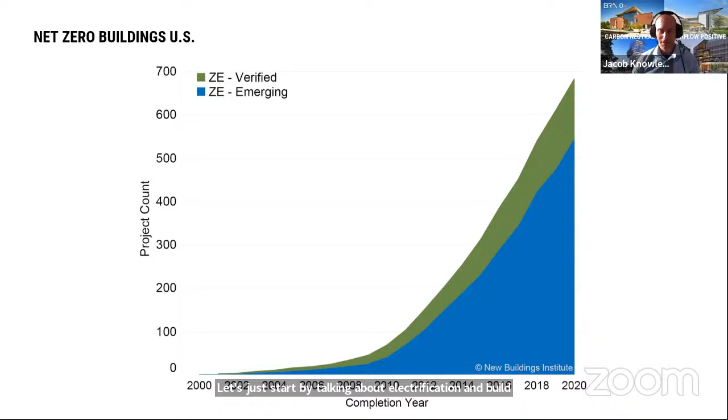So electrification of existing buildings. Let's just start by talking about electrification of buildings in general, and net zero buildings is growing exponentially in the market across the entire United States.

In Massachusetts, Built Environment Plus recently came out with a report showing that there is 5.5 million square feet of net zero buildings in construction or operation in Massachusetts, and 7.2 million that are net zero ready, meaning entirely, or almost entirely, fully electric buildings that are ultra efficient and ready to run on clean renewable energy. Part of what that study looked at is what is the cost of net zero.

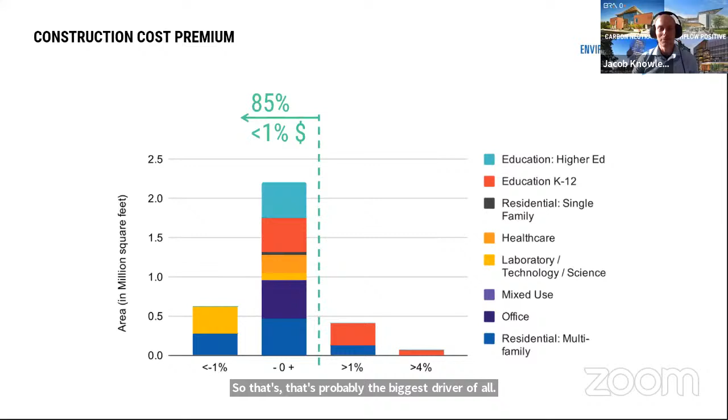Of the respondents, 85% showed that the construction cost premium was less than 1% compared to conventional design. That's probably the biggest driver of all that's made this possible, this rapid growth of net zero buildings. We've been working on many of those types of buildings and actually finding similar results in terms of the construction cost premium, typically being able to keep it below that 1% mark.

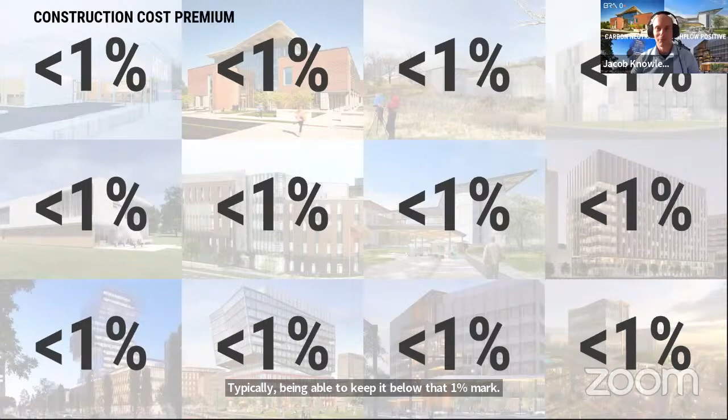Now that's for new construction, right? That's a lot easier because you have a big budget to work with. But the approach to net zero between new buildings and existing buildings is pretty consistent.

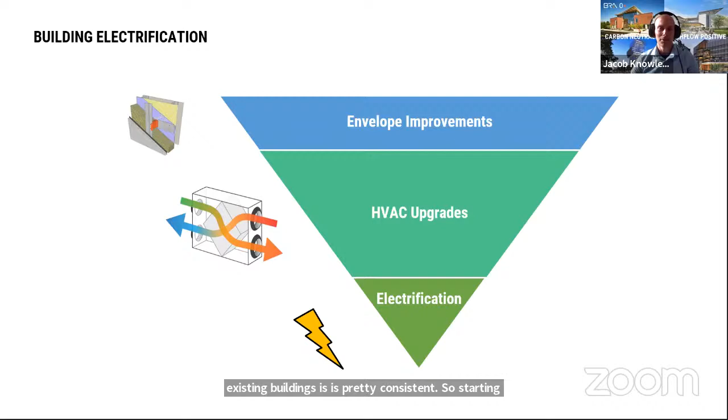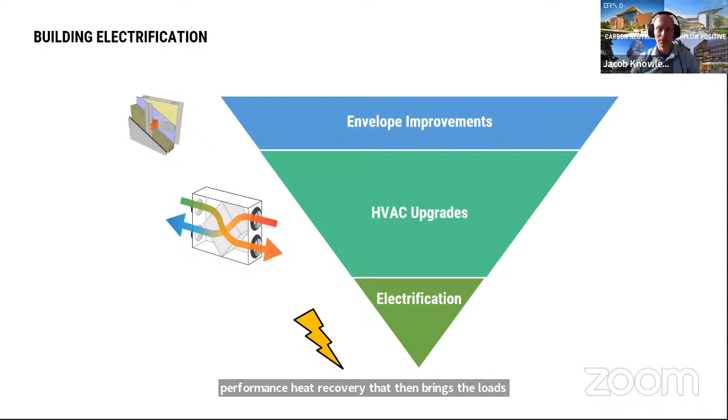Starting with load reduction first, you have to have a good envelope or make envelope improvements. You have to have efficient mechanical systems with high performance heat recovery. That then brings the loads down low enough that electrification, using heat pumps as your source of heating the building rather than burning fossil fuels, becomes not only viable, but makes it more cost effective.

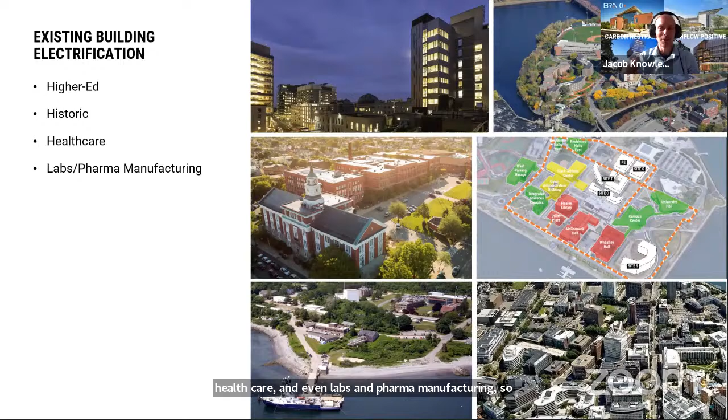So let's look at some existing buildings. We're going to talk a little bit about a few different building types, including higher ed, historic buildings, healthcare, and even labs and pharma manufacturing. So kind of going from easy to more and more difficult.

For higher ed, we've been working on some projects for UMass Lowell, UMass Boston, and others, URI Narragansett Bay Campus, for example, also looking at how do we achieve carbon neutral for their entire campus.

And there's obviously on a higher ed campus, there's a wide range of different building types, different conditions of the different buildings. Some are new, some are old, some are failing, some are in great shape. And so they have a wide range of energy performance.

Some of the key considerations that you have to take into account is how does it interact with the future growth of the campus? If you're going to be looking at district energy systems that are going to provide heat pump based heating and cooling, you want to plan for that future expansion, the transformation of the campus over time.

Another big factor is what level of retrofit is viable for the existing buildings to bring that load down first before you start to invest in electrification. And another big variable is, do you go with standalone electrification, or do you do precinct plants, or do you do a big central plant? Different campuses really lend to different solutions.

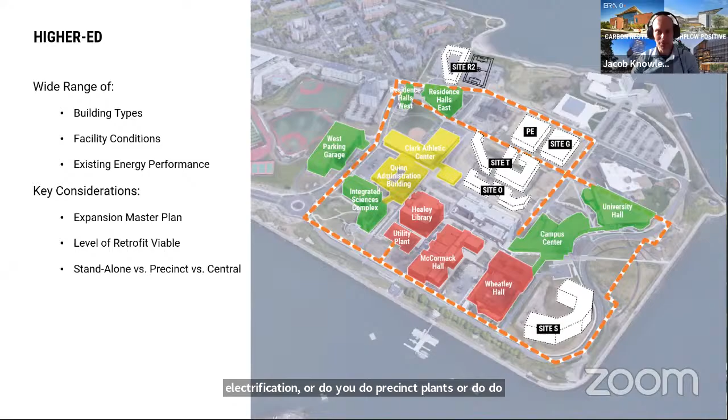So again, one of the key steps is bringing those loads down. We typically start by looking at the existing facilities, the existing buildings, identifying energy conservation measures, and particularly thermal heating load reduction strategies.

So it's not just about energy reduction, but it's also about reducing that peak load, you're going to use that peak load to size your heat pump plant. So the more you can bring that peak down, the better.

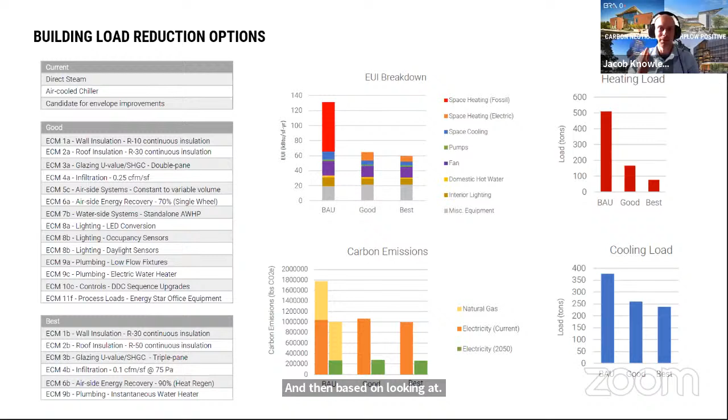And then based on looking at good, better, best, essentially levels of enhancements to the existing buildings, you can see on the left here, kind of business as usual, good or best level of retrofit options. And then you compare those with different types of heat pump strategies.

You could do ground source. That's kind of the old school go-to, is to go to ground source, because air source is a relatively newer technology. But now the air source technology has been accelerating, and market adoption has made it really a viable option. So we often want to look at a hybrid where we're looking at some ground source and air source combined.

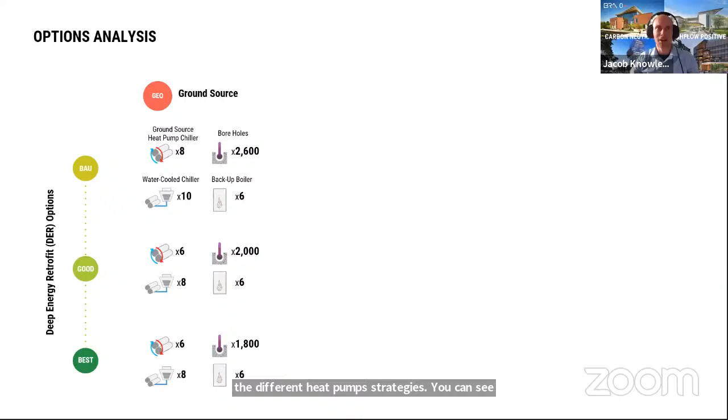And then the third option is to say, well, do you need to be 100% electric, or can you be 95 or 99% electric? Because those last few percents at a district scale often are the biggest drivers of that peak system capacity. And so as you start to look at what your scenarios would be, interpolating between those levels of retrofit and the different heat pump strategies, you can see there's a wide range of different outcomes in terms of how much infrastructure that you have to put into the plant itself.

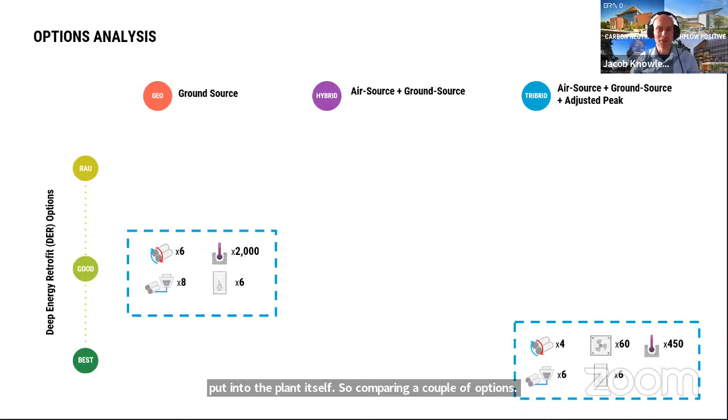So comparing a couple of options, you can see as soon as my computer stops bogging down on me here. Come on. There we go.

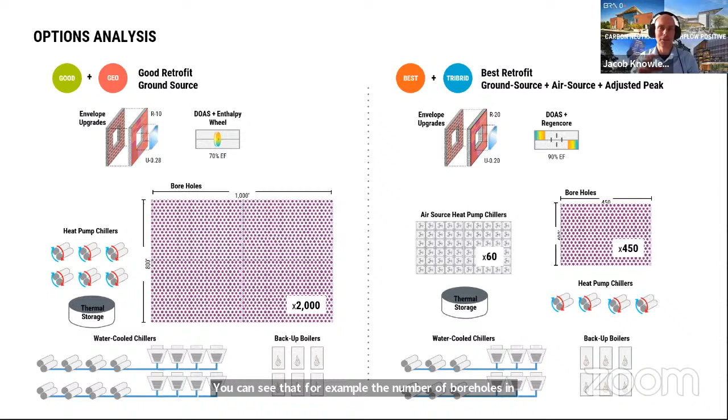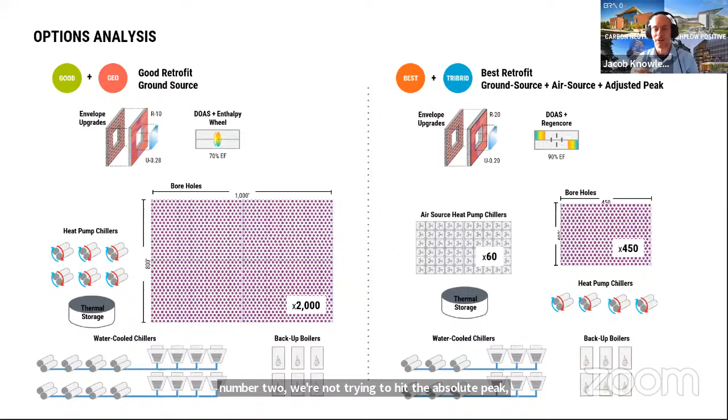You can see that, for example, the number of boreholes in a good level of retrofit with a fully geo system on the left is 2,000 boreholes for the geothermal system, whereas on the right it's only 450, because we've reduced the load, and we're not trying to hit the absolute peak, using air source heat pumps as part of a hybrid ground source air source system. That can be not just a budget driver, but can actually be the deciding factor of whether you can even fit the number of boreholes you need onto your campus at all.

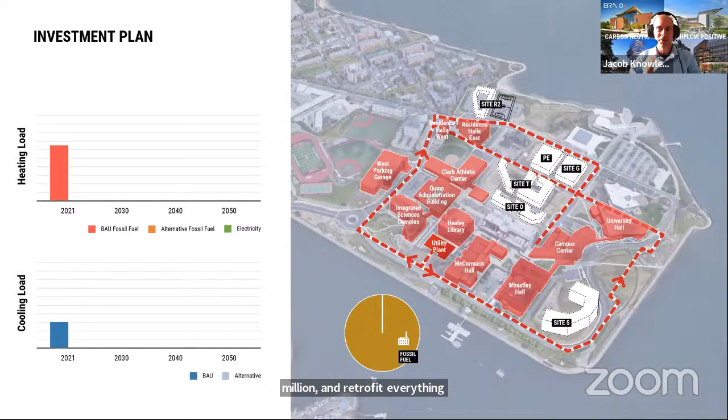So once you've looked through all of that set of options and picked your optimal outcome for that campus, you start to look at what is your investment plan over time. You can't just snap your fingers and spend $200 million and retrofit everything at the same time. So you want to be strategic in your sequencing of those retrofits, both of the buildings and the infrastructure, in time increments that are logical for the campus. Ultimately, having a real roadmap for operations to understand what you're going to spend when, what it costs to operate that system from that time forward, working your way towards a fully carbon neutral operation.

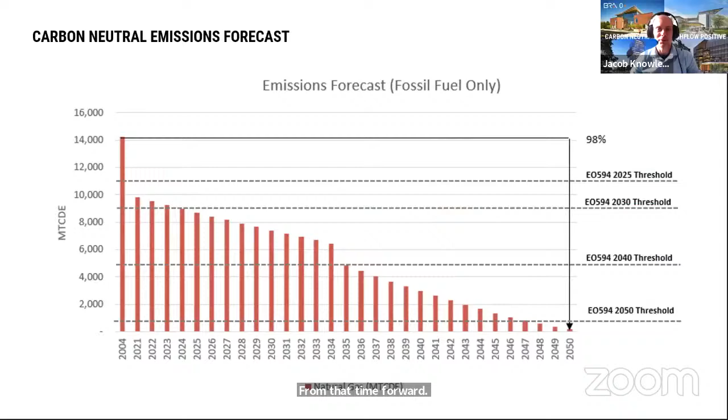So that's some higher ed examples. Historic buildings are a particularly unique challenge. We're working with the city of Somerville right now on all of their major city buildings, not including the schools, and some of these buildings are historic. So you can't just rip out the windows and put in a modern triple glazed window with fatter frames that have the fully insulated system.

So in some cases, maybe the best you can do is the sash replacement and weather stripping. Not ideal, but a lot of these buildings have relatively low window wall ratios. So if you can't go all the way in with super high performance windows, and you're really just trying to focus on air sealing and avoiding those leaks, that's a good option.

Strategies like smart vapor barriers and proper insulation techniques on the inside of existing masonry load-bearing structures is an important thing to evaluate. And then retrofitting the mechanical makes a lot of sense, looking at ultra high performance heat recovery on your ventilation air. Ground source versus air source again comes up here, where maybe in a historic structure, you don't want a bunch of air source units on the outside of the building, and you want to look at a geothermal system.

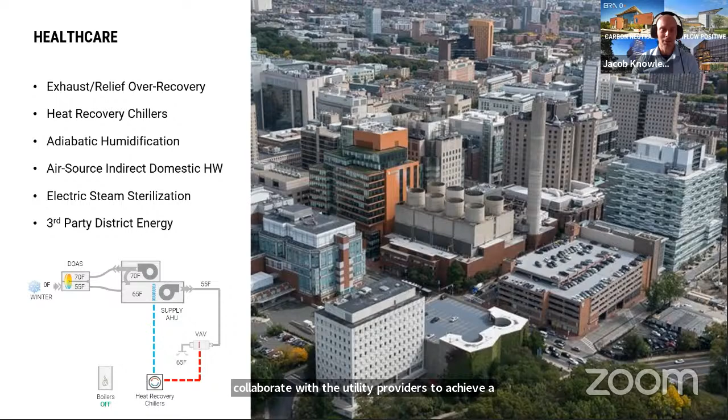Healthcare is an even bigger challenge, not only because it has higher loads and all these critical systems, but also in a lot of cases you have third-party central utility plants providing heating, cooling, electricity in long-term contracts. It's a challenge to figure out how to navigate the transition either away from those plants or collaborate with the utility providers to achieve a common goal of moving towards either electric or other fuel sources like hydrogen.

And finally, labs and pharma have even higher loads, particularly pharma manufacturing. Some pretty amazing technology is coming available now from the industrial world, where there are even heat pumps that can make steam. Sounds impossible, right? But if you have enough compression of the refrigerants, you can get it hot enough that you can boil water. So that's something that we're looking into.

Also, all that exhaust air leaving your labs is a huge energy resource that we're just not taking full advantage of with a conventional heat recovery system. So we're tagging heat pumps onto those heat recovery systems to basically supercharge them and create an exhaust source heat pump, a whole new world of heat pump systems by pulling heat out of the exhaust air. So these are the really exciting things happening right now.

And just to kind of bring it back to the beginning, that exponential growth of net zero and all electric new buildings was really unlocked by that moment where it became cost effective, and all these precedents started to build and show that it was possible. Well, same thing here with existing infrastructure on these big campuses and high energy buildings. We're starting to prove this out, we're starting to unlock it, and then there's going to be these precedents, and everybody's going to realize it's achievable, and there's going to be a sea change of transformation that's going to happen.

So we might need a little more financial leverage. For example, carbon emissions fines is going to be a lever on existing buildings that will start to tip the cost scales. But it's very exciting times.

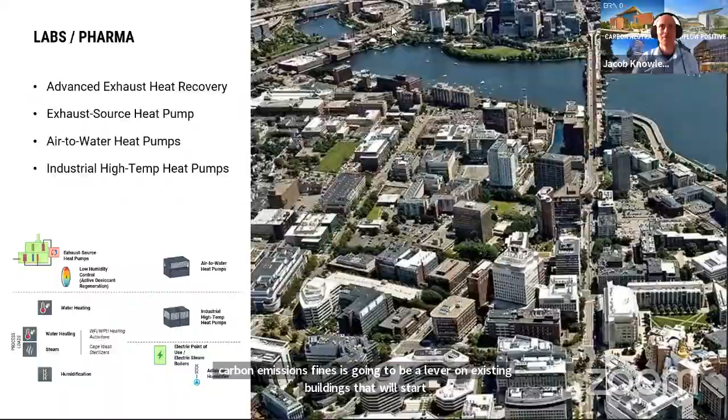Thanks, Jacob. I can see there's a lot of heat pumps in some of the solutions, and that's really a big change that's occurred. And we're seeing a lot of electrification policies as well, including some potential federal incentives in the Build Back Better or reconciliation bill that's under consideration now. So a lot of people are asking us, when and where will electric heating and cooling reliably lower carbon emissions compared to the fossil systems they're replacing? Are we already at that point?

What's your perspective? So that's another really cool thing - if you try to run an electric resistance heater, like a toaster oven, to heat a building compared to burning fossil fuels, there's a lot of places in the country where you're going to actually increase your carbon emissions. But that's what's so cool about heat pumps: they're not a 1 unit of electric in equals 1 unit of heat out. They're 1 unit of electric in equals 2 or 3 or 4 units of heat out.

For example, in ISO New England, like here in Boston, if you put in a heat pump versus a gas boiler, day one you're 50% lower emissions, because the grid is clean enough and the heat pump is efficient enough that you cut your emissions in half. And then you can ride the grid down as it gets cleaner and cleaner over time, as it's regulated to do by law, to get closer to zero. Or you buy renewables today and you're carbon neutral on day one, such as what Boston University has done. So using heat pumps is really unlocking our carbon neutral future right now.

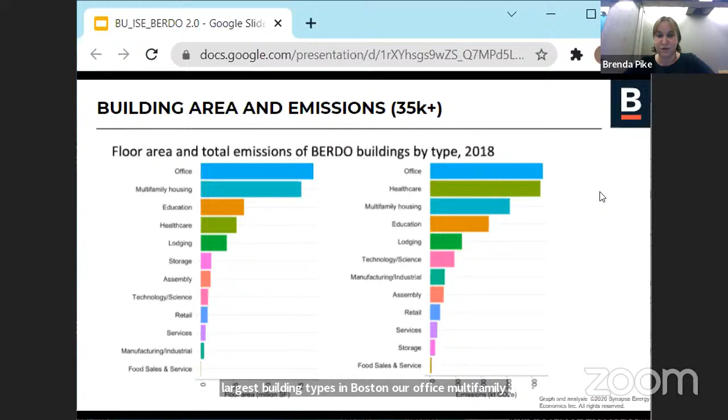And the targets are set by building type, and whether you look at it by floor area or emissions, the 4 largest building types in Boston are office, multifamily, healthcare, and education. So we'll just zoom into the standards for those. These standards were developed with our technical advisory group, which was managed by Synapse Energy Economics and included building owners, engineers, architects, etc. - probably some of whom are here today. And they looked at our benchmarking data for the last 5 years to set standards that were reasonable for each building type, but still met the city's 2030 and 2050 goals. These are set in kilograms of CO2 equivalent per square foot per year.

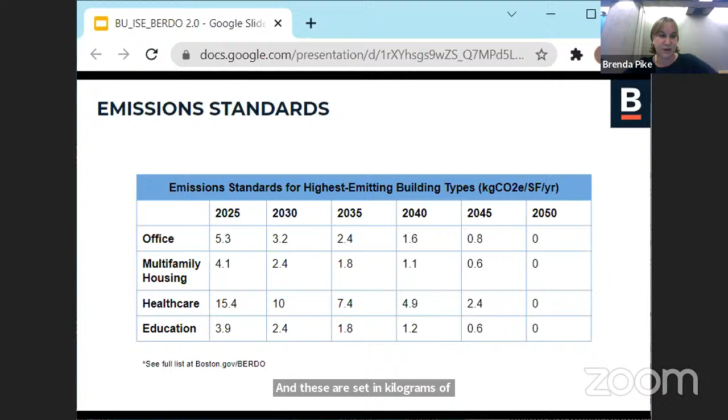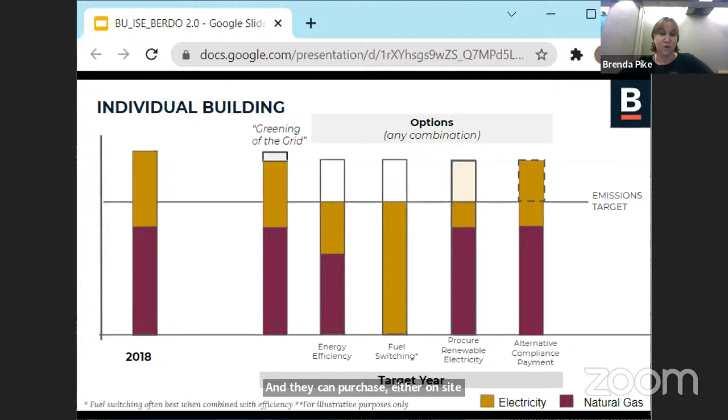So we have to make sure that we aren't requiring particular equipment. You can see here we're factoring in the greening of the grid according to Massachusetts' plan. And then to meet any given target, a building owner can choose to do energy efficiency upgrades, which will generally be the most cost-efficient option right now. They can do fuel switching to some sort of renewable heating and cooling, likely electrification right now. And they can purchase either on-site or off-site renewable electricity, or they can pay an alternative compliance payment.

And the alternative compliance payment is not a fine. There are fines, and those are set out in the ordinance. That's a standard amount per day, regardless of how close to compliance you are. But the alternative compliance payments are really intended for building owners who, for whatever reason, miss their target in a given year, and so for that incremental amount they can pay into a fund to help decarbonize other buildings.

In order not to disincentivize building owners from using other methods to comply, we set the alternative compliance payments to the average amount to decarbonize a building in Boston, which Synapse and the technical advisory group estimated to be $234 per ton.

And actually, let me go back here. If you want to dive into how the alternative compliance payments were calculated, Synapse's technical methods overview is available on boston.gov/BERDO. They estimated emissions, uses, and costs by building type using not just BERDO data and the ASHRAE Level 2 energy audits that we received through BERDO, but also tax assessment data, market characterization studies done for the Mass Save programs, EIA data, and the Carbon Free Boston Buildings Technical Report.

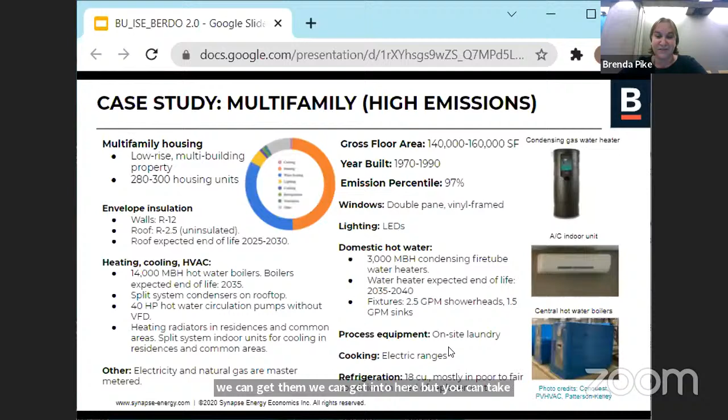But for this particular building, it makes the most sense to choose an individual compliance schedule. And then the major improvements that would get the building to those targets would be insulation at the end of the roof life in 2025, a VRF system by 2035, and heat pump water heaters by 2040.

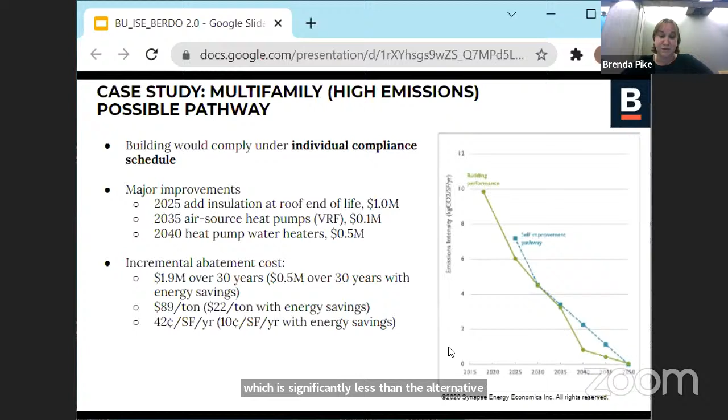And you can see the incremental abatement cost above what they would normally spend on their capital improvement plans is $89 per ton, $22 per ton once you factor in those energy savings, which is significantly less than the alternative compliance payment. So we're hoping that being able to do that comparison will really help building owners make decisions about this.

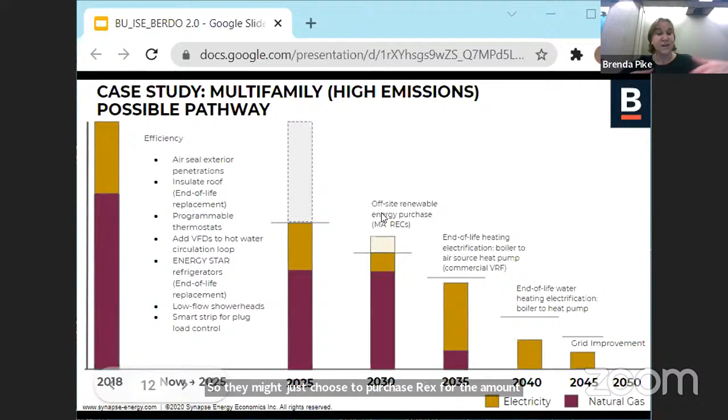And this gets into a little more detail about how they might choose to comply with each target. So in 2030, they don't have any retrofit plans. That doesn't fit into their capital improvement cycle, so they might just choose to purchase RECs for the amount that they're over the target. And then after 2040, they can just ride the grid to net zero.

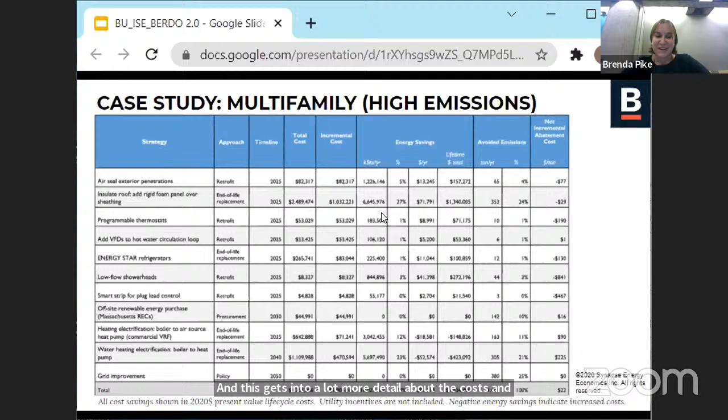And this gets into a lot more detail about the costs and savings for different measures. Again, you can take a closer look at this and the two other case studies that are in the appendix when the slides are sent out.

But pulling back a little bit, performance standards are being used across the country, with 7 jurisdictions right now having adopted them. There's a lot of information sharing going on between cities about this right now. I mentioned I'm working with Boston through the American Cities Climate Challenge, so 25 cities were chosen for that. And then also a group of cities have worked with the Institute for Market Transformation to learn about these policies together.

And there are some key differences between them. So for instance, Boston and New York have focused on emissions intensity for their metrics, but Denver, St. Louis, Washington State, and Washington, D.C. have all focused on energy use intensity. Different cities have different exemptions. For instance, New York exempts affordable housing because it would bump up against their rent control laws.

Some of them, for instance Denver, require each building to be on an individual pathway to net zero, with a set baseline for each building and an individual trajectory for each building.

DC requires all buildings meet the median Energy Star score or energy use intensity, which is reassessed every 5 years. There are benefits and drawbacks to all of these options, which are explored during the stakeholder engagement process. And all of these cities are different, so it makes sense that these laws are all slightly different, even if we're trying to get to similar goals.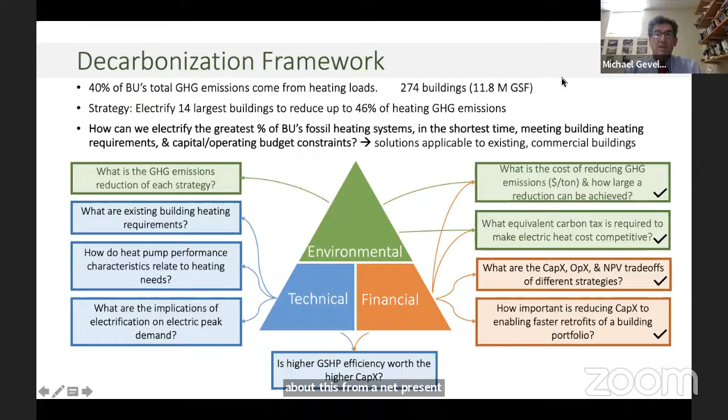Just to give you a sense of what we've been considering, as other speakers have talked about, you've got to do that energy efficiency first, but ultimately you're going to come to replacing the natural gas boilers that are being used, either boilers in buildings, or we also have 2 steam loops.

What are the technologies that really are at play here? There are going to be these heat pumps, lower temperature heat pumps, higher temperature heat pumps. I'm not going to go through the details of the cost, but these systems cost significantly more than conventional boilers.

So already we see there's a significant capital cost to doing this conversion. Another consideration is high temperature versus low temperature. Why is that important? Because you're doing this for an existing building, all the heat exchangers in the buildings are set. If you can avoid ripping those out and replacing them, it is a much more economical solution.

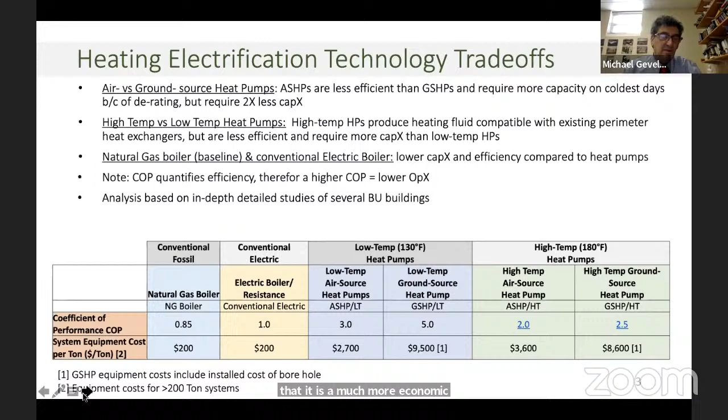So what were some of the key takeaways from the technical requirements studies? There's a bunch of key considerations that we've looked at.

How large a heat pump or heating system do you need to replace what you already got? Since it's typically going to be heat pumps, this is going to be much more expensive than the natural gas boiler. So you want to try to minimize the size of the heating system, but yet meet the heating load. And that leads into the capacity factor — that's the percentage of time that you use this very expensive piece of capital equipment.

And then most importantly is, what temperature does this alternative heating system need to supply to the building? Because you're working in an existing building, many of them were designed with 180 to 190 Fahrenheit operating temperatures, and with heat pumps, it gets much more expensive to supply that high temperature heat than the current default value of 130.

And then most importantly, when you add these electric heat pumps, are you going to fry out the electrical system within the building? We also have to consider the supply from the grid to the building. These were issues we talked about in the previous talk.

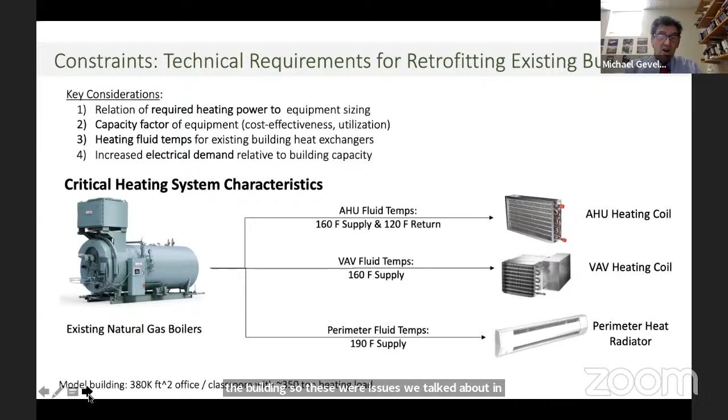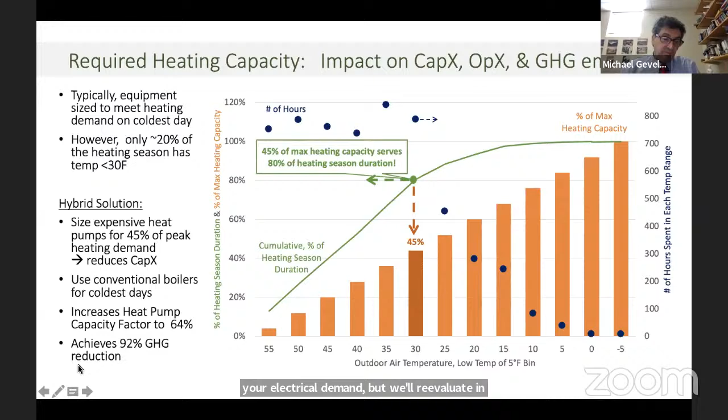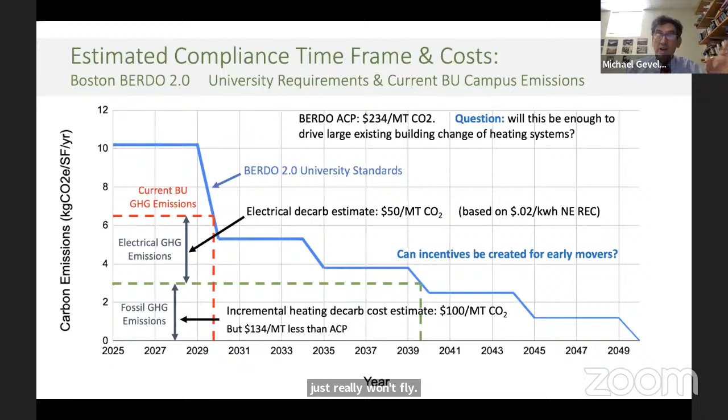Okay, thanks. So what you would like to do is, can you develop an incentive plan to get people to start taking action early? Any serious player knows they need to do it well ahead of time, given the planning and experience required. But just like my students, myself, we always wait until the day before an assignment is due, and that just won't fly. So the question is, what incentives can be created for those early movers?

So in summary, what I'm proposing here is a hybrid strategy. It achieves a 90% carbon reduction at significantly lower cost than other options I see on the margin. After running for 10 to 15 years, you could switch over to get even further carbon reduction. I've just gone through what the estimated impact is for BERDO for the whole BU campus.

But the climate needs, as I think we know from COP26 and over the last couple of decades, quick action. So how do we drive that? Can we create some incentives for early movers? So with that, I will stop sharing.

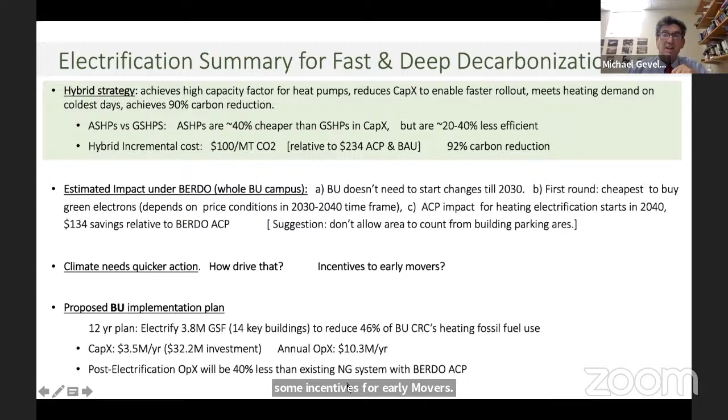Thanks, Michael. That was great, really cool to see all the analysis that was done and how that plays out in terms of cost versus your mission and cultural values. I think given time, we're going to go right over to Peter, and then we'll start with you in the Q&A, if that's all right—just staying agile here.

So over to Peter. Thank you. Peter, we see your slide, but I don't hear you, so just check your mute. Sorry about that. Someone would have their mute on. I volunteered to be that person.